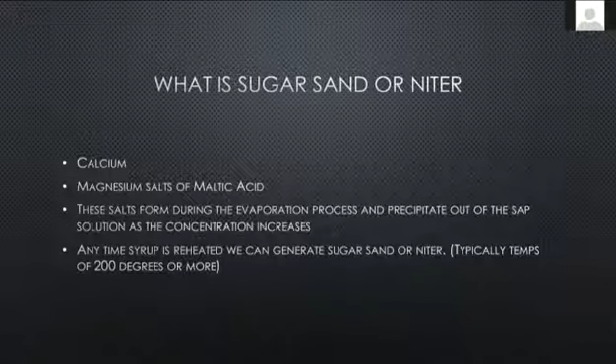So the more that we boil or the more that we process the sap using heat, the more noticeable these salts are, and we start to see that cloudy type appearance in our maple syrup. One thing to keep in mind, even if we do filter our maple syrup, if we reheat maple syrup over 200 degrees Fahrenheit, we can regenerate that sugar sand or niter again. So we can take that nice crystal clear filtered maple syrup and actually create sugar sand or niter if we pass over that 200 degree mark. So it's really critical to watch our processing and bottling temperatures.

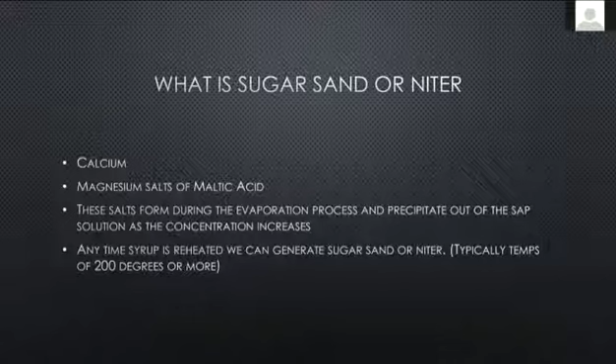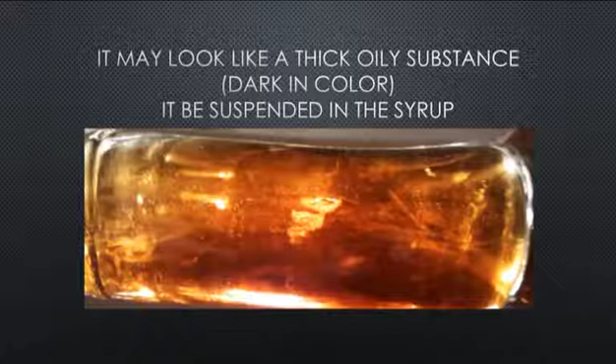So the thing to remember is, in a lot of cases, that sugar sand will take on several different appearances. One of the other common things that we see is it'll be a very fine, very grainy substance in the bottom of a bottle. It'll almost take on the resemblance of beach sand and be very gritty, very granular in nature.

So really, why do we filter? This is really the end product that we're looking for. We're looking for that nice crystal clear bottle of maple syrup. And when we start to talk about filtration, a few years ago, the IMSI, which is the International Maple Syrup Institute, set up some clear definitions for maple syrup. Not only did they set the definitions for maple syrup, they also set the new color grading scale and flavor grading scale that we're using today.

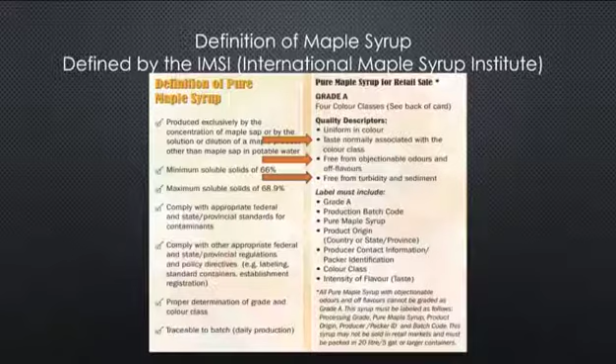So when we look at the definition of maple syrup as it was set out by the IMSI, a few things in their descriptions really come to mind. The taste, of course, should be normally associated to the color class that it's graded in. It should be free of objectionable odors and/or off flavors. And the one we're really going to talk about mostly today is it should be free of turbidity or sediment, which is our sugar sand or niter. So in their definitions, they're calling out that we have this material removed from our maple syrup prior to marketing.

So when we look at taste and flavor of maple syrup, if the sugar sand remains in our maple syrup, that sugar sand and niter can cause off flavors in our syrup. And these can range from a multitude of different flavors, such as a burnt flavor that you can pick up in that maple syrup, a scorched flavor. We can even pick up some bitterness in our syrup, or even perhaps a hint of buddiness on some of the late season syrup. And a lot of that flavor is in that sugar sand. And if we can remove that sugar sand, we can remove, not all the time and not all of them, but a fair bit of the objectionable flavors.

The other thing that we look at is if maple syrup has the sugar sand in it, the syrup may have a gritty texture when it's consumed. So when you actually taste a sample of that syrup, it may leave kind of a gritty, sandy flavor on the palate, for lack of better terminology. So it is really important that we get that filtered out of our syrup, because it will transfer a little bit of off flavor to it and may give it a little bit of a gritty texture.

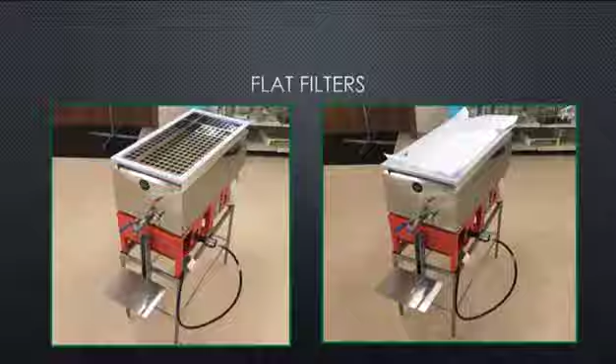So filter bags are referred to as gravity filtering. Bags are made out of different materials: wool, Orlon, or felt. Orlon is probably our most common filtering medium today. They can be used with a pre-filter to increase the performance. They make a pre-filter that slides down inside of these bags, and that will hold a large amount of sugar sand prior to getting into the filter bag to increase its longevity.

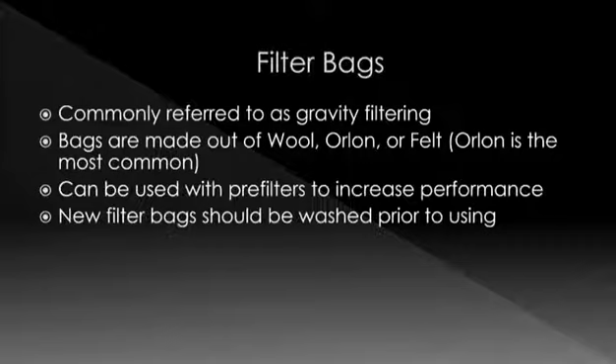New filter bags should always be washed prior to using. We want to make sure that anything that happened in the manufacturing process is washed out prior to being used. Filter bags should also be dampened with water before they're used, and we want to wash our filter bag with hot water only, no bleach, no soap. Maple syrup is very, very good at picking up any flavors or odors it comes in contact with.

A great story that some of you have probably heard me use before is that Mountain Fresh Tide laundry soap tastes about the same as it smells. I went to a family sugar house, and being an equipment salesperson, naturally I always have to taste test everybody's syrup. So I got a sample of syrup from them. The first thing you typically do when tasting syrup is smell it, and it had a kind of unique fresh scent to it. I wasn't really sure what that was. So I took a taste, and you could taste the soap in the syrup.

I asked the man and the woman, what is your process? What are you doing with your filter bags to clean them? Well, we just throw that filter bag in the wash machine without any soap when we're done using it, run it through a water wash, and then remove it and air dry it. Well, there was enough soap residue left in that washing machine to pick up that soap flavor in the filter bag. So like I say, hot water only, no bleach or soap.

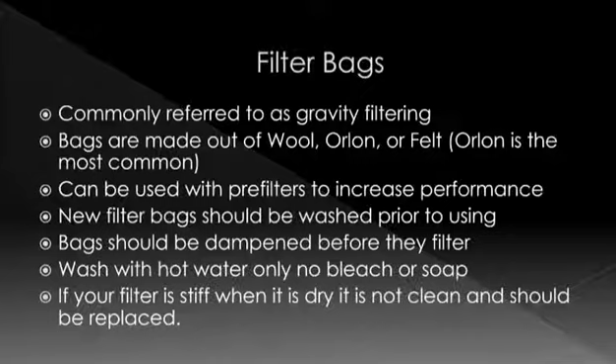If your filter is stiff when it is dry, it was probably not clean when it was put away, and it should be replaced. That filter should be soft and very flexible; it shouldn't be stiff. Threadbare bags should be replaced. Like I mentioned before, give your bag the sniff test. Make sure that you don't have any objectionable odors in that filter bag.

Whatever you pour through that filter bag picks up whatever smell it has. If it was put away wet and has a musty smell, or if it was stored in a sugar house that didn't have the greatest ventilation, that smell and odor can transfer right into your maple syrup. So just keep that in mind.

Like I say, filter bags should be completely dry before they are stored. We want to make sure that we don't come up with any odors or grow any mold in that filter bag by putting it away a little bit damp.

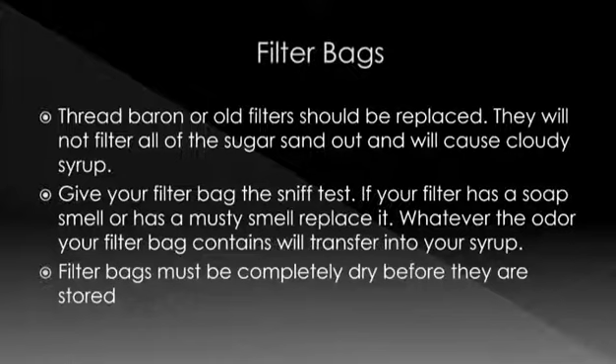So we're going to talk a little bit about vacuum filters. Vacuum filters have come into the market over just the last few years. The reason this was really developed is we wanted an option to have better performance than an Orlon bag, and a price point that was not as expensive as a filter press, something in the middle of the road that would do a very good job of filtering syrup.

So when we look at the vacuum filter, we supply vacuum through the fitting located on there, from a shop vac, and we should get a new, clean, dedicated shop vac for this. Please remember that we are making food. We don't want to use a shop vac that we cleaned the garage with last week. So buy a small shop vac and keep it dedicated for use with your vacuum filter.

The filter goes on top of the vacuum filter, and this uses an Orlon filter disc, and it can use a pre-filter with it as well. So it is a very similar material to the Orlon filter bag or the flat filter, and the pre-filter material is relatively similar to the pre-filters that we're using with the flat filter and the Orlon filter as well.

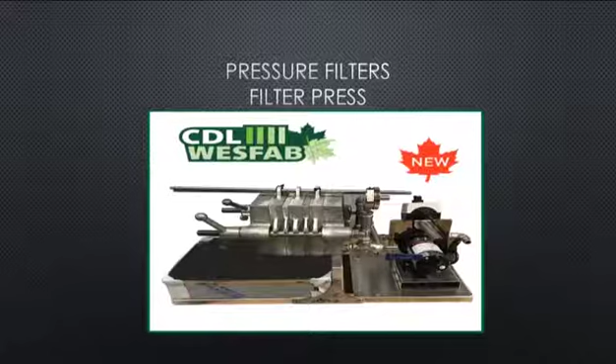The next thing we're going to talk about is filter presses. There are several presses out in the market, and we're going to grab the concepts off this one, and all the different manufacturers on the round table will have their chance to talk about it a little bit more in detail. We're just going to go through the basics of how the filter presses work.

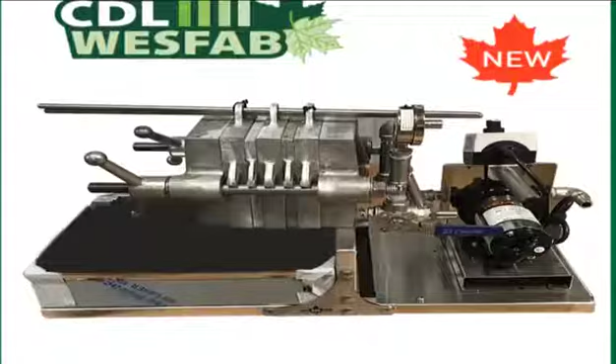When we look at a filter press, pretty much all of our manufacturers are going to look very similar to this. When we have the incoming syrup, it's going to go in on the suction side of the pump. That's where our syrup and DE mixture will enter our filter press. And when we talk about pumps, we can have electric diaphragm pump, gear pump, air diaphragm pump, hand diaphragm pumps, and those will get talked about in more detail later with the round table. But basically, on the suction side of that pump is where our syrup and DE enter our pump. And then at this port over here, the syrup will enter our filter press. Very simple and straightforward.

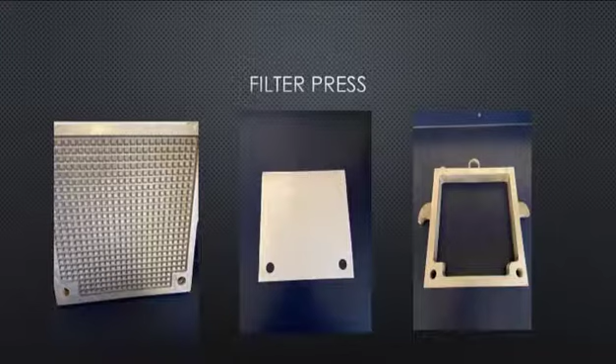The primary components of the filtration part of the filter press are really broken down into 3 parts. On the far left, we have what's called a waffle plate. The center picture is our filter paper, which goes between each plate and frame in our filter press. This material is actually preventing the DE powder from going into our maple syrup. As the filtration process goes forward, the syrup and DE come in contact with this paper. The DE will not go through the paper, the syrup will, and that's what really creates that final finishing, where we remove that processing aid from our maple syrup. And the last component is our hollow frame, which we will talk about shortly. So those are the 3 primary components of that filter press.

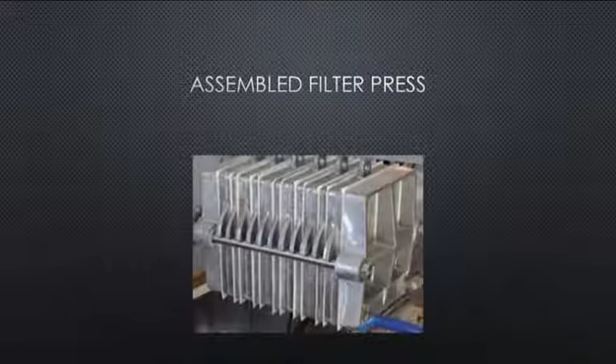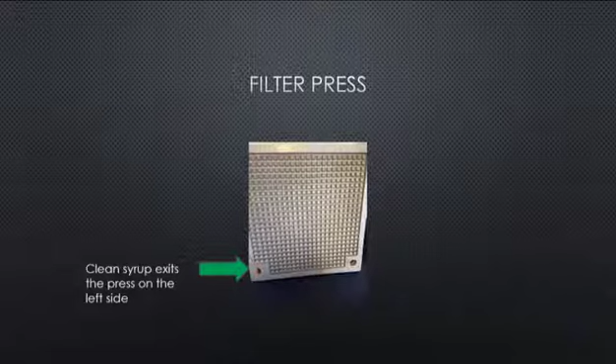The first thing we're going to look at is our waffle plate, and we're going to get a little tutorial of what's going on internally inside of that filter press. On this particular filter press, the clean syrup exits the press on the holes that you can see on the lower left-hand side. So that's the clean side of our filter press. Where I mentioned in the first slide the syrup enters our filter press, the dirty syrup enters on the right-hand side, and it's going to flow down those tubes. As we put our filter press together, all of these holes line up across the bottom, and that's how our syrup flows down the filter press.

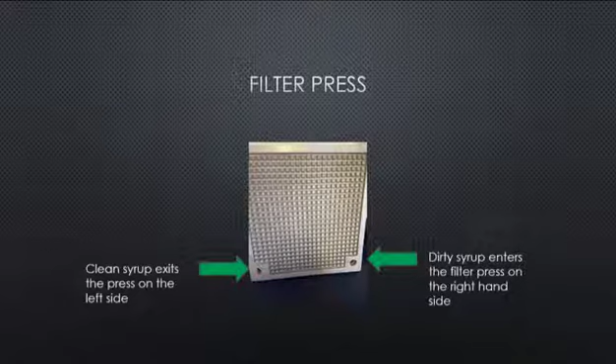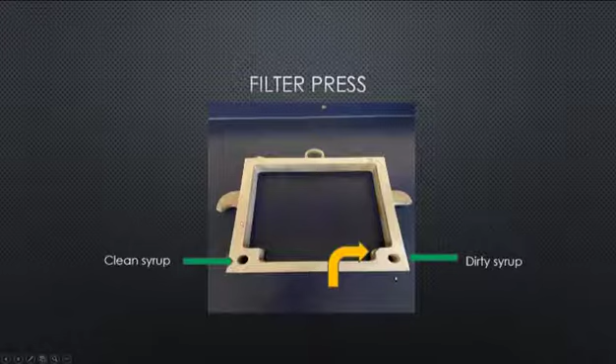So what happens internally inside of the filter press? So we have our clean syrup side of our filter press. We have the dirty syrup side of our filter press. Once the syrup is coming down the dirty side of our filter press and it enters the first frame or this hollow cavity, there is a small hole, and it's kind of hard to see. I'll tell you what I'll do here. We'll kind of point it out.

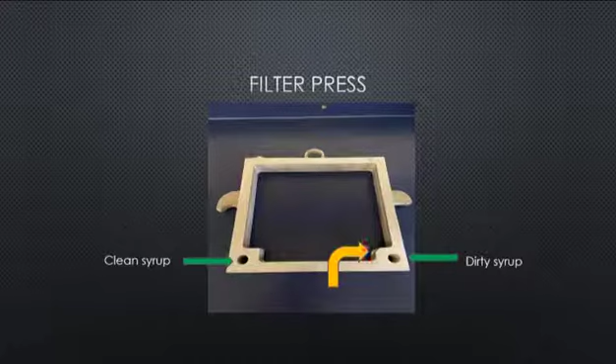Right here in the casting, we will have the hole that is basically machined from our dirty syrup inlet into the inside of our hollow frame. So our syrup passes through that channel into this hollow frame. Inside of this hollow frame is a large, wide open area, and this is where we accumulate our DE powder and our sugar sand and/or niter that we filter out of our maple syrup.

So what happens during the filtering process is we begin to fill up this cavity with liquid and filter aid, and as the press continues to run, these cavities get more material in them, and eventually they should get full and make a solid cake if you're operating your filter press correctly and using the correct amount of DE powder.

So when a filter press is started, we should recirculate that syrup and that DE mixture through the filter press. And what that's going to do is charge or coat all the papers in the filter press with a layer of DE powder. And as all of these papers have the coating of DE across the surface, we will see the discharge of our syrup go from a cloudy material, and it should go out crystal clear.

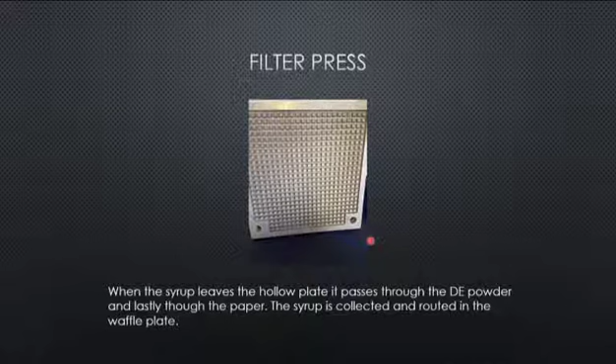So if we back this up just a slide, it's hard to see, but on this particular photo, those slots or channels are located right down here. So the syrup flows through that grid or that waffling on its way down to the discharge point. Like I say, it's going to travel through here into the clean side of our filter press. So that's really what's happening on the internals of that filter press. Once it passes into the clean channel or the clean side of that filter press, it's going to go out the discharge hose, into your bottle or into your barrel, whatever the case may be.

So a few things about filter presses, tips and tricks and different things. We want to make sure that we're always using a food grade DE powder. Okay, we see a lot of times in the maple industry, corners like to get cut once in a while, and all of a sudden, hey, I can pick up this swimming pool DE powder for $15 a bag less than the food grade. Well, there is a reason it is food grade DE powder, and we want to make sure that you are using a food grade DE powder. So stay away from the swimming pool DE and some of the other stuff that you might find out there.

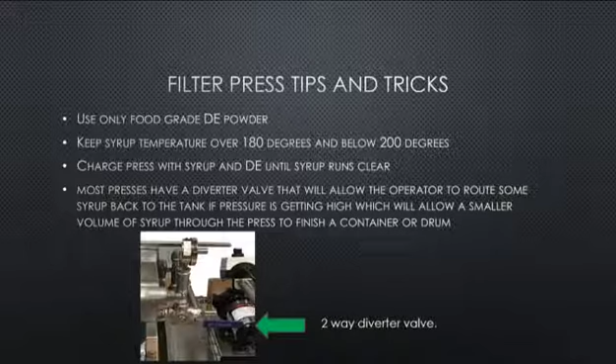We want to make sure we keep our syrup temperature fairly warm. A good shooting point is, try to get it through that press at 180 degrees. The nice hot syrup going through that press definitely does help the situation. One thing to remember is we do want to stay below 200 degrees.

So say, for example, if I'm pumping syrup through a filter press and I'm filling bulk barrels off my evaporator, and I've got my draw off set at 219 degrees, and I'm going directly through my filter press and right into my barrel, and my press is staying hot because I have a great flow of syrup coming off the evaporator. We really want to make sure that stays below 200 degrees, because if that syrup going into that drum is over 200, we can develop that sugar sand or niter once it's through the filter and in the drum. So it is very critical that we try to keep that below 200 degrees, so that even after we get that sugar sand and niter filtered out of that maple syrup, it does not redevelop by having the temperature of that syrup too high.

Like I had mentioned before, we want to make sure that we charge the filter press with DE powder until that syrup runs clear. We want to make sure that before we start filling a bottler or the filler or whatever the case may be, that syrup is nice and crystal clear when it comes out of there. Most filter presses have a diverter valve that will allow the operator to route some syrup back to the tank if the pressure is getting too high. And that really is only going to be on a pump that does not have a variable speed. So that would be your gear pump, your electric diaphragm pump.

What you can do with the use of that diverter valve is, if you have a fixed-speed pump and your pressure is getting too high, you can have another hose attached right to this fitting here, and you can route that back into your tank to relieve some of that pressure, so you can get a little more capacity through your filter press. The other thing with this diverter valve is you can turn this handle into the up position. And that'll allow you to use the filter press pump as a transfer pump. So with the valve in this position, we can go through the filter press; turning the valve to the other position, we can run syrup out this discharge fitting.

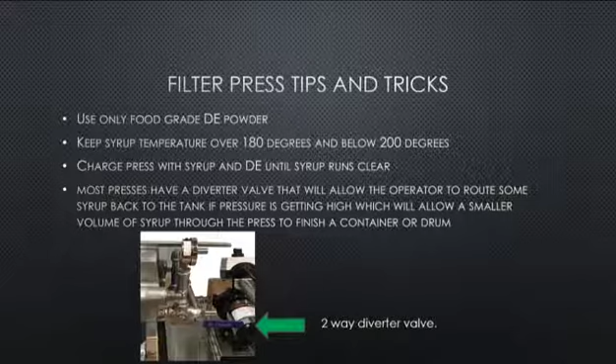A few other little things with filter presses. So if you're running a longer bank filter press, say for example a seven bank filter press, and you are filtering maple syrup and you're getting right down to the tail end, your pressure is coming up on your filter press, you're approaching 70, 80 pounds, you're starting to see that syrup weep out between the plates a lot more than normal, and it's starting to leak, and you have just a small amount of syrup left to finish, and you shut the press off and you're like, jeepers, I really don't want to clean that entire filter press because I only have a gallon or two left to filter.

What you can do is you can take your filter press half apart, say for example, and you can clean out 2 or 3 of your hollow plates, and then you can put the papers back in, reassemble that filter press, mix some DE into the remaining syrup that needs to be filtered, recharge that filter press with the 2 or 3 hollow cavities that you just cleaned, route that syrup right back into the tank until it runs clear, until we get that good coating of DE powder back over the filter papers. And then once the syrup is running clear, then you can go back into your bottler or back into your barrel, whatever the case may be.

Like I say, there's a lot of times where we end up with a plugged filter press and we have just a small amount of syrup left to filter, and that's a great way to kind of cheat the system to finish up that batch without having to clean that whole press.

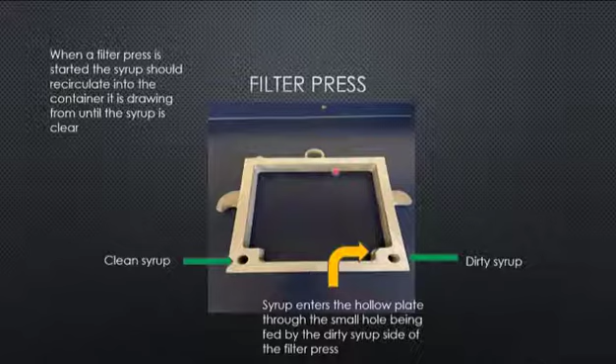And jumping back a couple more slides yet, you can see just a little bit of residue right here around this edge. We see some plugging with sugar sand or niter on these ports. So say, for example, if you take your filter press apart, and just say, gosh, I took my whole press apart and my pressure was up to 80 PSI or 90 PSI. And the whole filter press, the cakes are all nice and solid, but I open this one up and there isn't a thing in it.

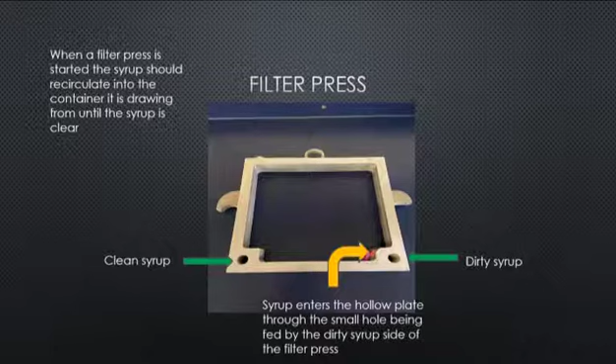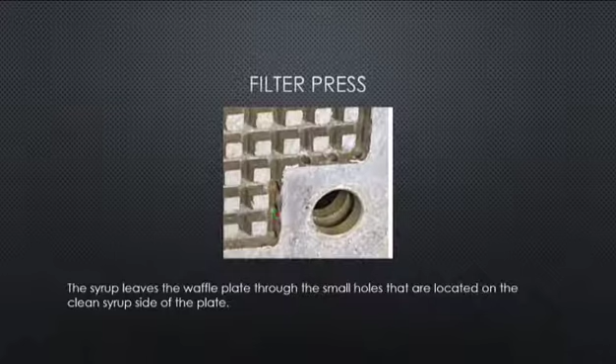Well, check your inlet hole, make sure, like I say, that we haven't plugged that up with sugar sand or niter. And then as far as overall performance goes, like I say, watch these holes here, make sure we're keeping all these ports clear here as well. With that being said, that's about all I have in the presentation as far as the presses go.

I will see if I can figure out how to get this baby opened up here to answer any questions. Maybe Teresa can chime in here as well if she is around. Am I ready to go? Okay, Jim, I have one question for you. Can you bring that over?

You mentioned the powder as a filter aid. Yes. Do you have to declare that on an ingredient statement if you use a filter press? The answer to that is no. Even for organic certification, it is used as a filter aid, or a processing aid. It is not considered an ingredient, so you do not need to list that on an ingredient statement.

Am I ready? Jim, I have another question.

What is better, an electric diaphragm pump or an air diaphragm pump? Well, it all depends, so there's several different things there. An electric diaphragm pump is going to run at a fixed speed, okay? So as the pressure builds in your filter press, if you want to bleed off some of that pressure, you would open up that hand valve and route that bypass line back to tank to take that filter press up just a little bit higher in pressure, or shut it off, like say when you reach that 80 psi.

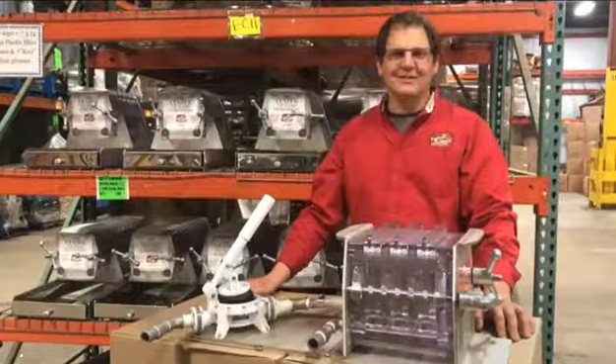Hi, this is Kevin Lawyer at Leader Evaporator, highlighting our new hand pump filter press. This features 3 polycarbonate frames, this hand pump, and a stainless steel body. This will be available this spring for order, along with the rest of our presses. Please contact our dealer network or check us out online. Take care.

Hi, this is Kevin Lawyer at Leader Evaporator, highlighting our new hand pump filter press. This features 3 polycarbonate frames. This hand pump

And I apologize for that. The YouTube autoplay got me.

So that was Kevin introducing our new hand pump filter press. It's a 3-frame filter press made with the polycarbonate frames. It's rated to filter 10 to 15 gallons of syrup in one batch of filtering, but obviously that depends on how easy your syrup is filtering that day.

It has got the same hand pump that has been used for a long time in the industry on the hand pump filter press, and it has the same polycarbonate frames and same stainless steel mesh plates that we've used in our clear filter press line for the last 8 or so years that we've had those filter presses available. It's been working really good for everybody who has it.

All right, guys, let's get right into this. I had to film this today because I was not able to go virtual, but hopefully I give you some good information about filter presses, their function, their use, and some tips. Now, first of all, what I want to say is if you're watching this and you're still wondering about a filter press, obviously you're a hobbyist, and that's okay.

The vast majority of people who make maple syrup in Wisconsin are hobbyists, and I was there once just like you guys were. I was literally cooking over an open pan until I got this whole setup that I have up here. And it was relatively over the last short period of time of a few years. But with that said, I can tell you this, the filter press was easily the most influential purchase that I've ever made in my operation.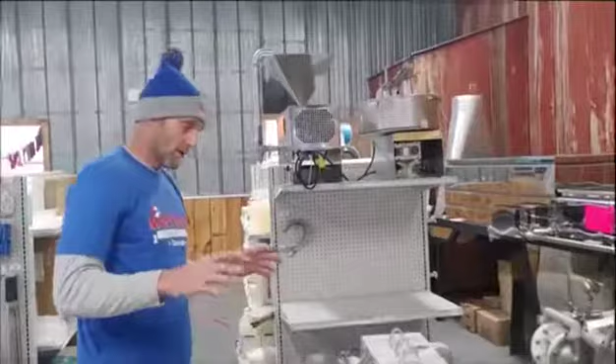It just took lots of headaches out of the whole process. You don't have to mess around with those Orlon bags and pre-filters, which honestly are just a big headache as the syrup just cools down and refuses to flow through them. The filter press is going to solve those problems and give you crystal clear maple syrup one time through. Now, let's talk a little bit about the filter presses themselves. If you're a hobbyist and you want to go with a filter press, there are a few options.

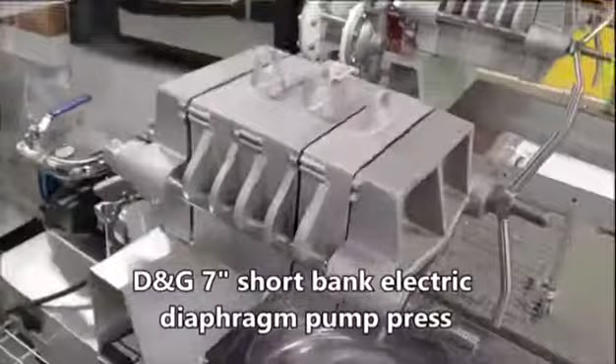This one here is a Dominion & Grimm 7-inch short bank electric filter press. Now this has an electric diaphragm pump on it, which is really nice. DG went to these a few years ago. They were the first one to do this kind of on these entry-level models. The other companies were still putting out units with the electric motor, pulleys, belt, and gear pump. And to me, let's just leave that on other pieces of equipment like air compressors. This is nice, it's simple, and it works well.

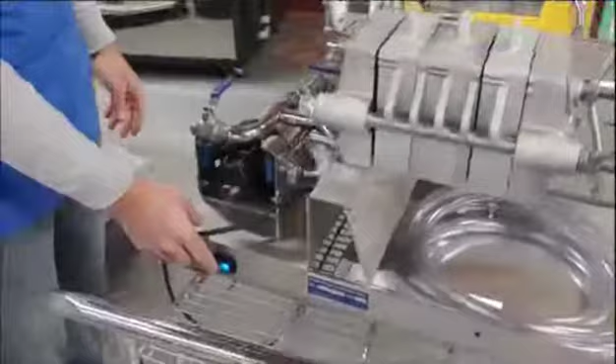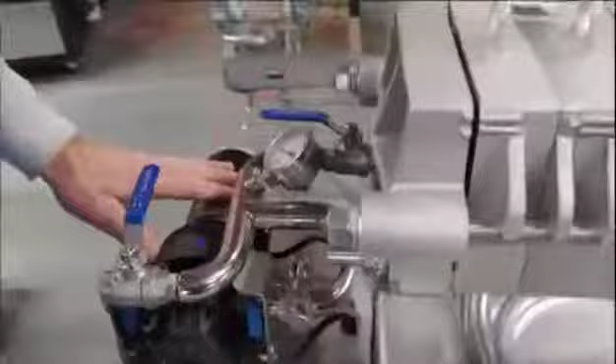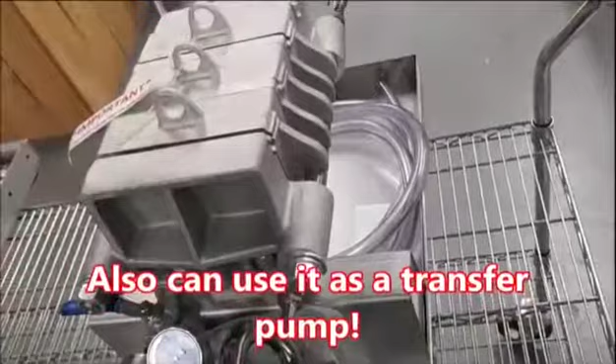Here, let me flip it on. It's pretty quiet. So, you've got your nice stainless steel piping back here. You've got your electric diaphragm pump. You've got a couple of valves on here. You can actually use this and bypass the press itself or the bank of plates itself, and you can use this as a transfer pump, which is a nice feature to have. You can transfer liquid syrup from one container to another.

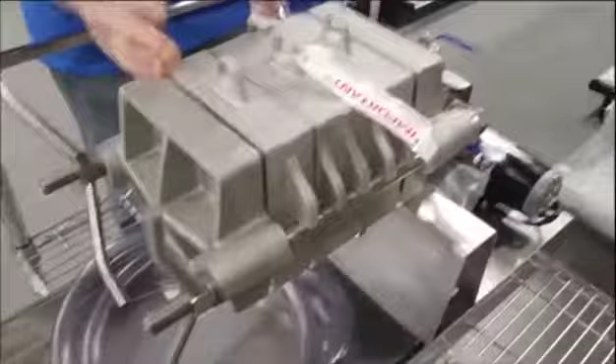But if you use it as a press, this one has 3 of the hollow plates. This is where all your settlings and your DE gets caught up in here, and the reason I like these is they are thicker than most of the other makes that I've seen out there. This hollow plate is quite a bit thicker, so that means more capacity for filtering than the other small filter presses out there.

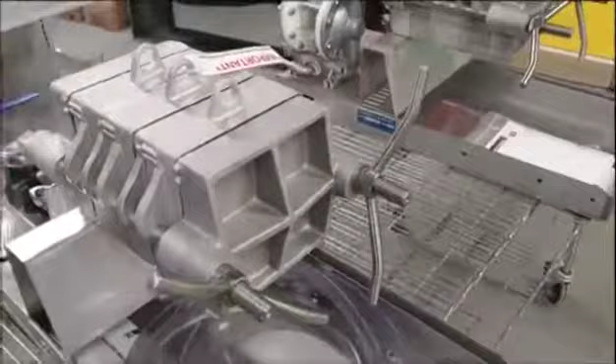You're gonna put a paper filter between each one of these plates, and then you mix the DE or diatomaceous earth in with your hot syrup, and you will filter it through this press. Just turn on your pump and really put your draw hose into your hot syrup and turn it on, and out the outlet hose comes your filtered crystal clear maple syrup.

You know, there's really not much to this. You can't do a lot wrong except possibly put these plates in backwards, but there are markers on here to show you which way they should line up. Right here, you can see those on this side.

Something like this, if you buy it from me at my shop, comes with the hose to get you started. It comes with a 50-pound bag of the DE. That's what you need to mix into the syrup as a filtering agent. And also, let me grab this. It comes with a box of the 7-inch filter papers. So that's kind of a brief, quick rundown on that filter press.

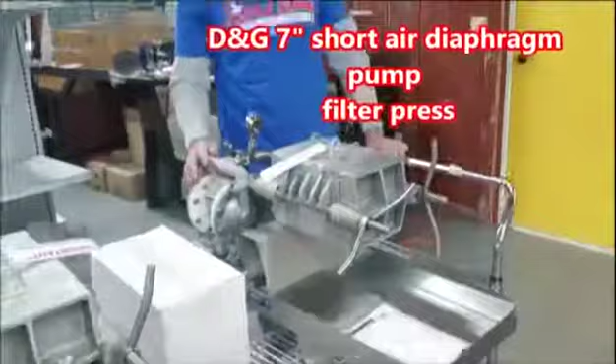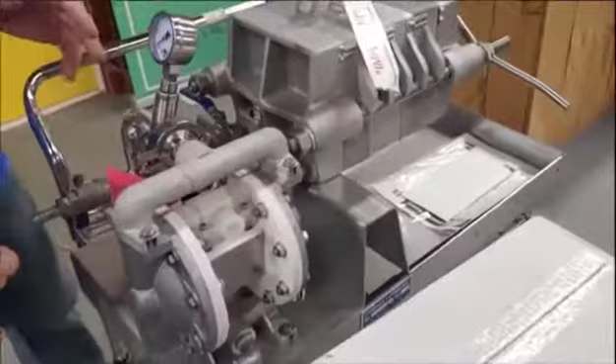Okay, over here, guys, as another option is the same exact filter press, but this one has an air diaphragm pump on it. Now this is an air pump that you run with an air compressor. Now, the main advantage with this over the electric pump is you can control the air pressure to it, so you can control the flow of the syrup through the pump.

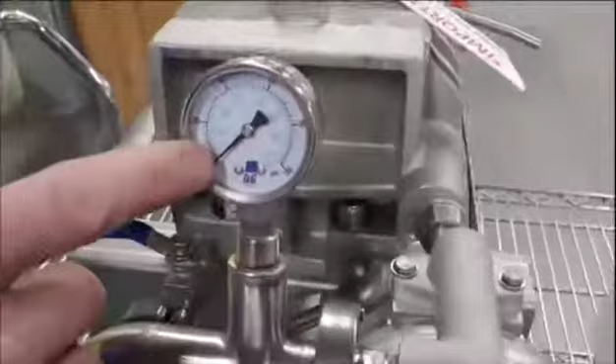When you are running these, you're going to want to run until you get about 50 PSI, around there. You can kind of get a feel for it after you get more comfortable with it. But once you get the pressure up to around 50 PSI or a little more, you know that these hollow plates are getting full or your paper filters are getting clogged.

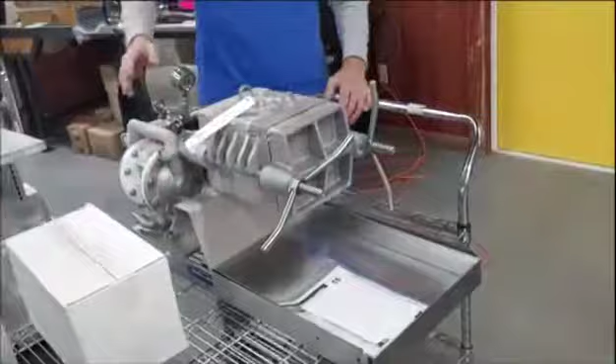So with the air pump, you can kind of control your pressure a bit more, control your flow a bit more, rather than with the electric pump, it's all on or all off, and all the pressure of the electric pump is on those filter papers at one time. And of course, like I said, with the air pump, you can control that more and there's less pressure all at once.

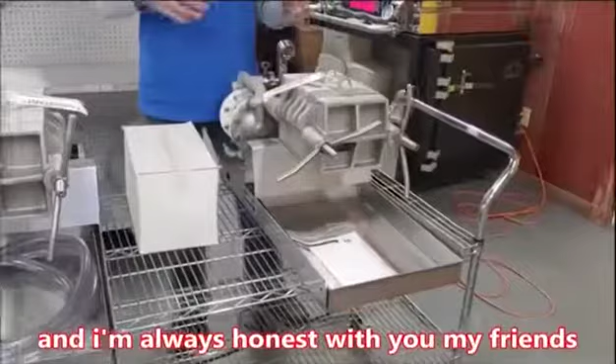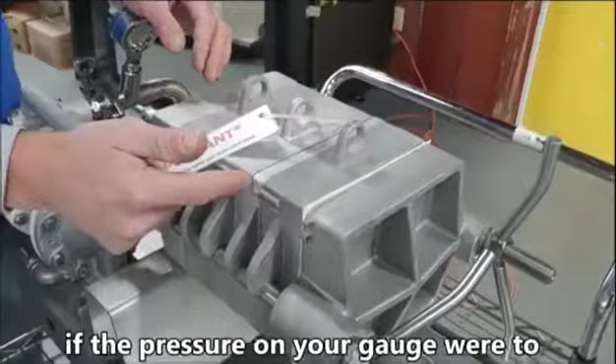We've talked a little bit about these filter presses. Let's talk about some tips for filtering your syrup and how these things function. Like I mentioned before, these are the filter papers that go between the plates. This is for the 7-inch press. It's really super easy. You just put them in there, and then of course you're going to put one between each plate like this, and you just simply tighten down these handles, and that's how that's held in there.

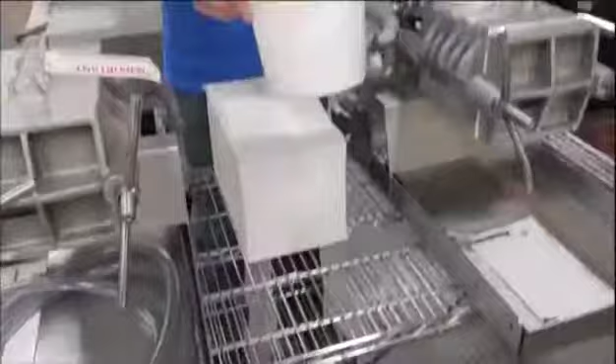This is your diatomaceous earth, DE, or filter aid, some like to call it. And you can see that it's just a white powder, and that is actually pulverized fossils. And so it's nothing that can hurt the syrup. It's not a chemical. Sometimes you'll have people ask if it changes the flavor. No, it does not. All that stuff, including the settlings and things in your syrup that you're trying to filter out to get clear, are going to be in these hollow plates between those pieces of paper.

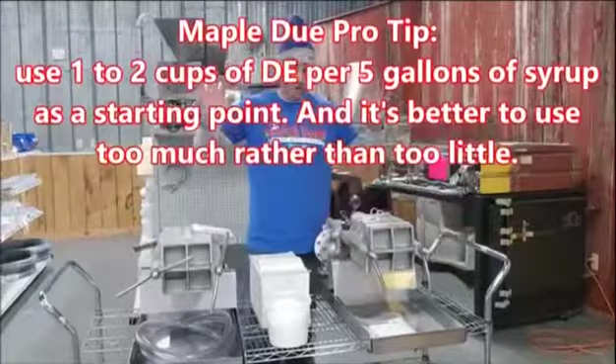So you don't have to worry about that. It's not adding anything to your syrup. It's not changing the flavor. It's not doing anything like that. So rest assured, no problems there. The other thing you want to do is get your syrup up to 180 to 190 degrees from where you're filtering it from and into your bottler or whatever. You got to have it hot to go through these presses.